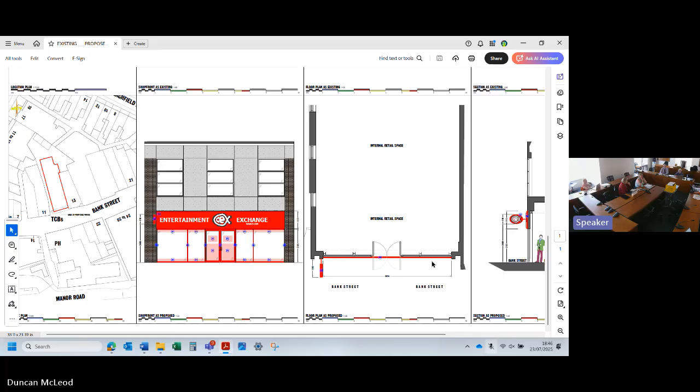It's annoying because it's on Bank Street and I haven't been able to get a photograph of it, unfortunately. It looks horrible, those big banner signs. That's what these are.

So what would you do instead? We're trying to get people living back in the city centre, getting flats developed over the top - the gaming station opposite, above Fat Willie's workshop, is being converted into flats, and the chemist has got flats coming in over it. So I guess the old NatWest Bank is empty on top.

Does it give an idea as to how long it's going to be illuminating its signs for? Because I really don't see the point of an illuminated sign that close - you can't get far away from it. I am objecting to that in my mind - fine, have a sign, but it doesn't need to be illuminated.

But there are ways you can do a sign which isn't illuminated, because we definitely have a policy looking at this - a standard that says ensure signage enhances the shopping environment in the host building. Newquay is full of signs that compete for attention - size, shape, material, and colour - which often results in a discordant, cluttered shopping environment. Avoid using large box signs that often disregard the building. Now, to me, that is a large box sign. Yes, it is. So I would object to that.

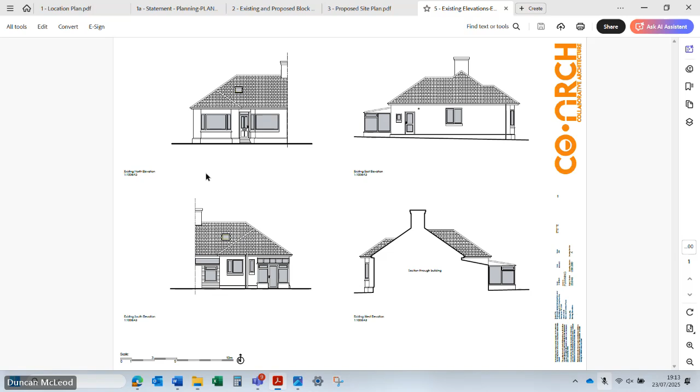And then you've got this box which has no windows on three sides, and only has windows on the front side, which I don't think they show on here, do they? No. So then they have the outbuilding elevation. And it's made from corrugated iron - it's a corrugated metal box.

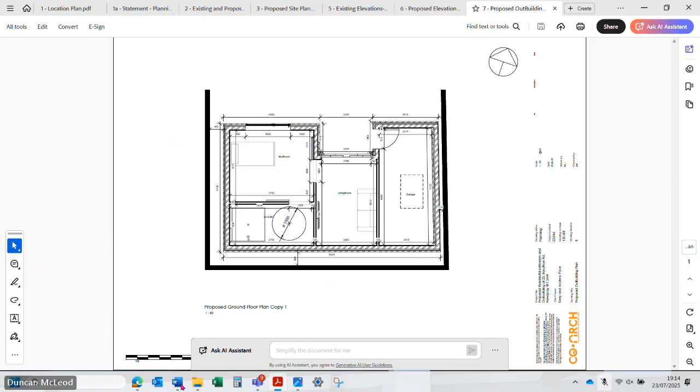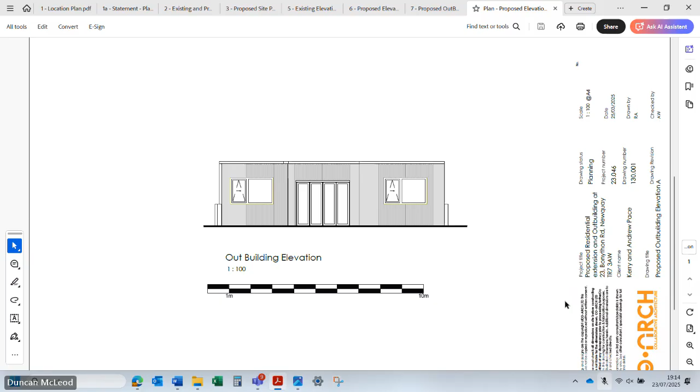If you like, proposed outbuilding plan - have you got the proposed outbuilding elevation? So these are the only windows. There is, I think, a roof window on this side. So it has fold-out windows at the front here, but this is set in, so it's like a C shape, which you can't tell from seeing it from the front. So this is what they'll be looking at from their house, from that new extension. It's a little one-bedroom flat, isn't it? Because it's got a living room. Yeah, it doesn't have a kitchen or anything, I don't think.

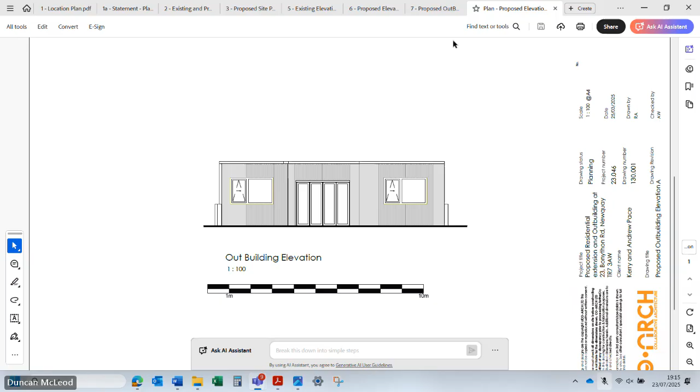So if we then have a look - I see what you mean, the garage, that's the existing garage. So if we have a look then at the proposed floor plans. Well, it's got the whole lot, I think. There is a separate one for the extension. Have a proposed outbuilding, okay. That's the house, but this has the extension in there - it has the outbuilding in there.

So these then are those fold-out windows, like concertina French windows, I presume. It still has a door which it's calling a garage, but basically would be a storeroom. And then it has a bedroom, little sitting room, and an en suite. So there's no cooking facilities there. How can that be for two? So it must be just for the one. I don't think it was made clear. Possibly for someone to care for the older one.

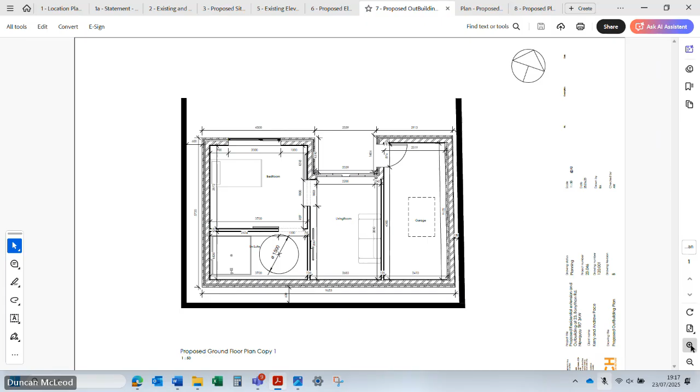So I'm not sure on that. It's a shame they haven't given it a porch, to give it just a covered area for that doorway going in, just a little roof. You'd think they'd put a roof over the top of that. Do you see what I mean? It doesn't, it looks like a window. If it's a window, then it hasn't got a door into it. So I was a little bit confused. I am inferring it's like French windows, but as I said, it's a bit odd.

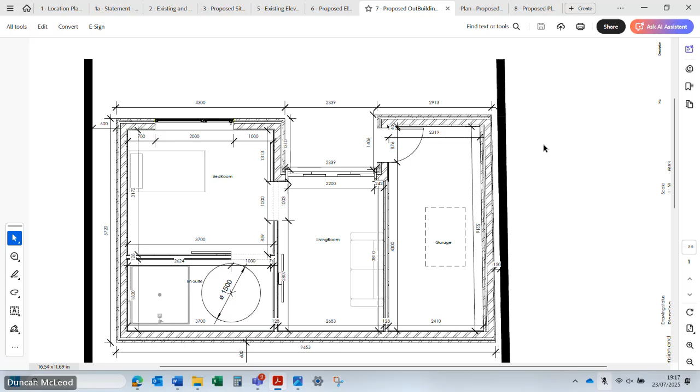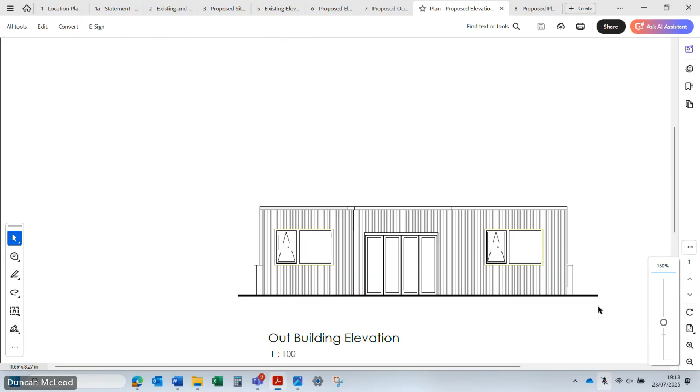Proposed. There we go. So it's put a window in the garage, but I don't think that's on the plan. Because this would be the garage bit. Right, that's the garage. But the only access to the flat appears to be these bifolding doors. Yeah, but it hasn't given that as a door, and that seems really odd to me. Sorry if I'm being a bit particular, but I don't think that garage window's there on the plan because it's got the roof light in it.

Do you want me to have a quick look at that? So there's a window - you see, there's the garage with no window, and no window.

So I think what they're planning to do is they're talking about respite care. So I think they will introduce someone who will live in that and take care of the children who are still in their bedrooms in the house. I think that's their idea, that's what they appear to be saying. And then they're saying it will allow the youngest child to gradually develop independent living skills. So he, or she, will move into that back place.

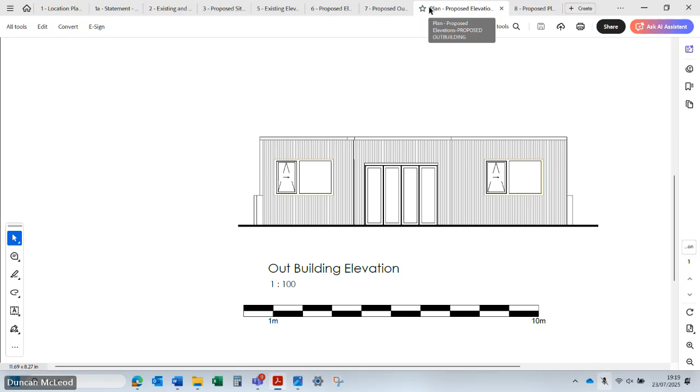I haven't got a problem in principle with any of this, but the plans aren't accurate. That's what I've got - that we're going to be giving permission maybe to something which isn't consistent. Well, there's a window there, and there isn't. And there isn't a plan. And what's the roof going to be like? Is it flat? It's just a flat roof with that roof light in over the garage.

I mean, we also have to look at it as a precedent for development along the back. But I understand why they need it. But the bathroom bit in the bottom left-hand corner, where's the window for that? Well, it won't, they'll probably just have a vent out. There's lots of internal bathrooms you have with no windows.

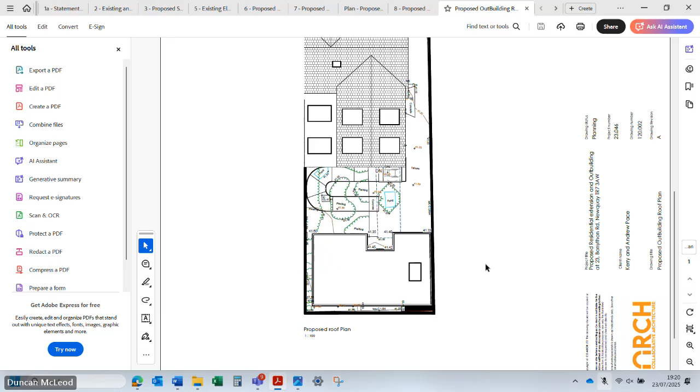I suppose the first question is, do we have a problem with them building an annex in their garden at that particular point? Forget what it's used for. No, I don't, providing there's no windows in the building. Well, it does set a precedent for... But it is backing onto flats. And the garden's large, so they've still got a front garden.

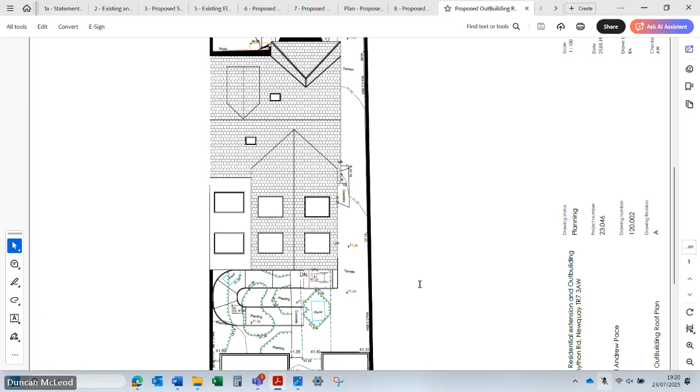Depends on extending the house, if there's windows. Yeah, I don't think they are. I think their windows face quite sensibly. No, I just put that as a subject to. But I would have liked another skylight over here, or maybe two. Yeah, you're right about the conflict in the plans, aren't you? Because they've got a Velux window on the roof, a skylight, and yet the plans say there's a window at the front, outside, on the plan.

And why isn't this covered over as a porch? I find that very odd, especially. Is that down to us to decide?

It's not, it is their choice. But they're going to have concertina doors, that seems an awful lot, you know, when it's blown a gale. It doesn't... but again, that's not a planning consideration. It's not, sliding doors when necessary. So I think we need to focus on what we're trying to focus on.

I mean, I don't have a problem with them building an annex in the garden - is that what we're saying, we set a precedent but we don't have a problem with that? It's a big garden, and to fit the gradient, because the steepest gradient you can have is 1 in 12 for a ramp.

So that's why it's so large, having to curve round to get the gradient right. So there's no kitchen, because the meals will be provided. Yeah, what they want is no thresholds, that's why you've got the funny setup - no thresholds, minimal doors, sliding doors when necessary, which is across the door front.

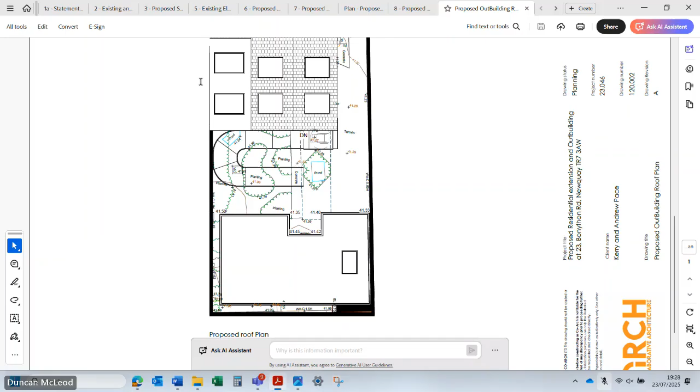Right, application 4, PA 25/03692. 10 Central Square, change of use and conversion of restaurant bar, Class E, to a place of worship and associated community facilities, Class F1, including consent to display advertisements.

Are you considering this one together with the next application, Duncan? No, let's look at the building. We've got two separate applications here. Although the first one says including consent to display advertisements, that consent is actually a separate application. So perhaps we'll look at that one separately.

So, the block and location plan. Oh sorry, before that, did we need an annex clause on the previous one? Can we annex clause on that as well, please? I had that written down, I just didn't vocalise it. Yep, thank you, all right.

So this is quite an extraordinary application, I've never seen anything like it. I know, yeah, I know. Are we okay with this?

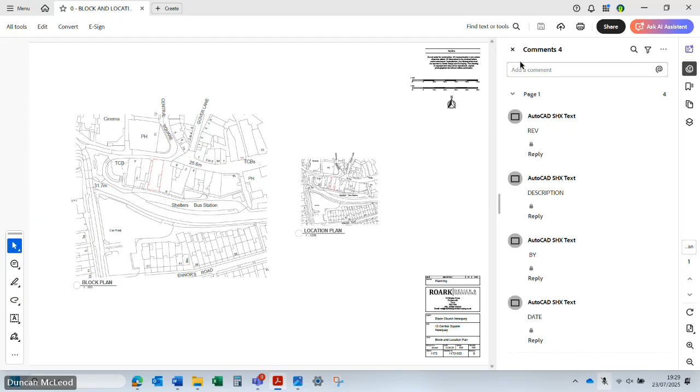Is it the old Lloyds Bank? So yes, this is the old Lloyds Bank, which does have a nice granite frontage.

Do you remember looking at the signage for this? No, I think it's not there now. It just arrived, it never applied for anything. Okay, anyway, so that's your building.

Right, so yeah, we're going to look at the block and location plan just to show you the red line site, and to note that behind the building is the bus station.

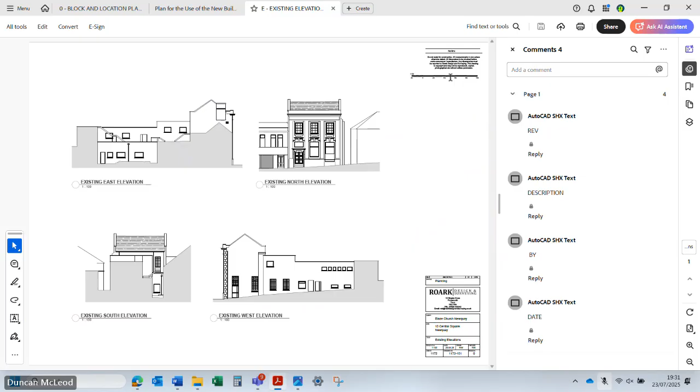Yeah, so we will look at—there is in fact a little bit of a change around the front, but we'll look at that in a moment. The key change, there are no significant changes to the exterior of the building, other than the existing elevation—you'll see towards the back of the building they are putting in a kitchen extractor unit. Unfortunately, Public Protection have said, well, you've not provided a noise impact assessment associated with this, so they're not happy with it until that has been provided.

They think the church is going to be noisier than the restaurant bar. I think they think the extractor unit is potentially going to be noisy. I don't know about the actual church and it's bought the building. Have they? I wouldn't know, I really wouldn't know. I believe one of my colleagues did a little bit, was quite interested in this and had a little look for me. I think that the Blaze Church, Newquay, has been operating out of Tall Trees, if that means anything to anybody. Oh my word, really? Yeah. That's huge, Tall Trees. Will they be taking all 3 dance floors up?

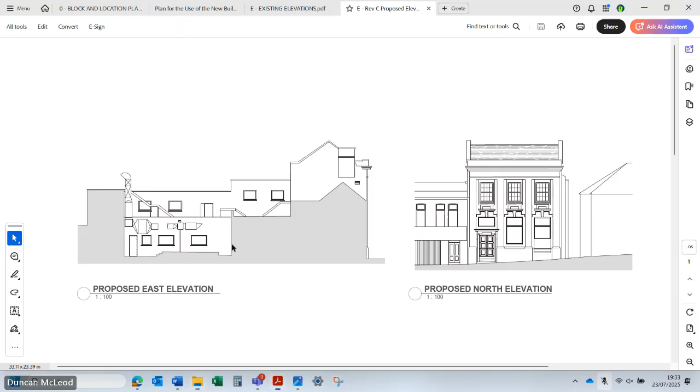Yeah, we've got—they've provided this sort of exotic drawing of the kitchen extractor unit. It does seem quite significant.

Noise, impact, noise and odour - we're really going to want to be satisfied about that. Doors and windows, yeah - replacing the roof, replacing all doors and windows.

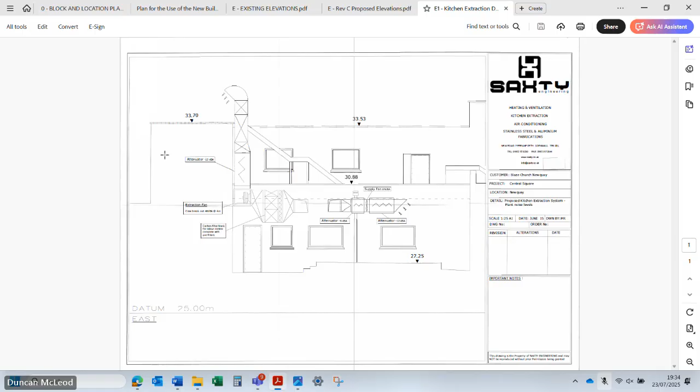So that's the existing floor plan. The proposed plan has no real internal changes - we're just given an idea of what they're going to be using the spaces for: kitchen, office, a refreshment station. We've got several activity spaces, but they don't seem to be physically changing the indoor layout.

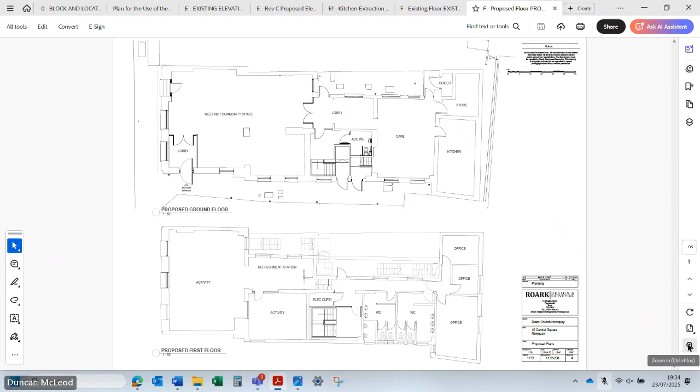What I wanted to draw your attention to, though, is that on this side, the principal entrance will be this side door. So if we go back to the street view - currently you've got these - that is going to be the principal entrance there. Not the front, but this side door.

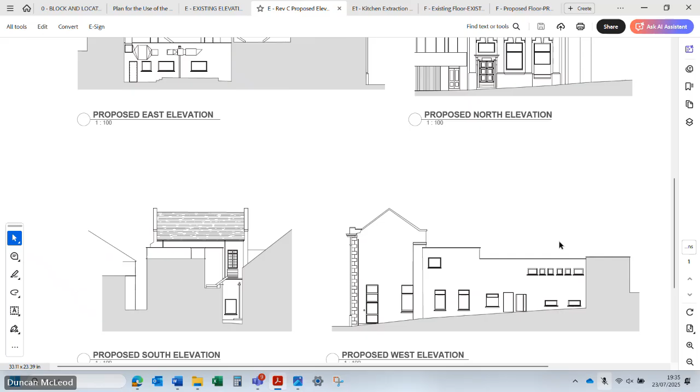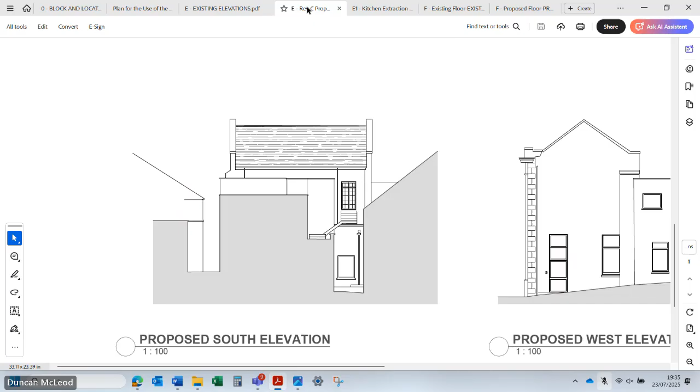This one here, I think they're replacing doors and windows, because currently they've sort of got - let's just come down - currently they've got lots of kind of gratings and stuff to stop people robbing the bank. What they're going to do with windows, because you've got these beautiful wooden, small pane windows - what are they going to have? What do they think the windows are going to look like?

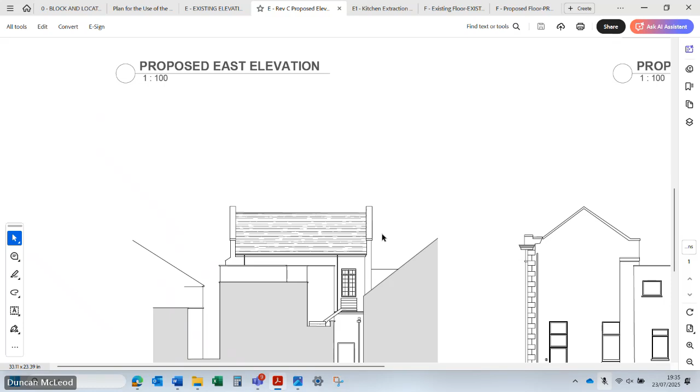These aren't - no, I don't believe that they're changing those, are they? I certainly - the changes that I could see were on the side of the building. I couldn't, if we're looking at the front of the building, I couldn't see any.

They're saying replacing all doors and windows, and to do that they're going to need more planning permission, I think. So is this just change of use by any chance? This is change of use and conversion of a restaurant bar to a place of worship. They're not asking us about what they're going to do to those lovely windows at the top.

And there is a cash point as well at the front of the building. Are they going to keep that there? Is that still there? I don't know, it's just still there. It's used all the time. Oh, so we're losing another ATM.

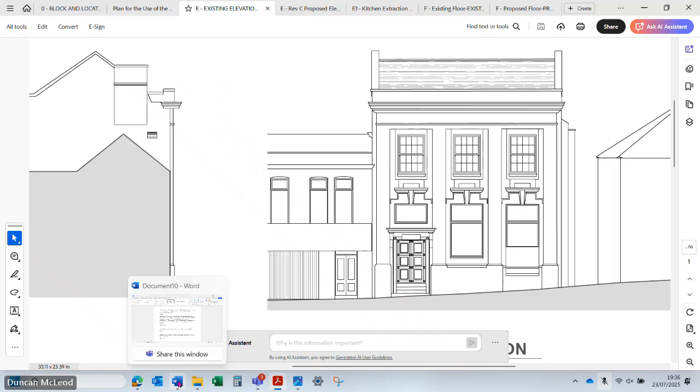Well, funnily enough, it's not shown on the plans, but it could still stay, couldn't it? We've got it there, because there is a big thing about the loss of ATM machines, isn't there? I think we agonised when they put it there in the first place - because it's such a nice building.

Yes, but it was a Lloyds Bank, so it was there when the bank was there, and it's still usable. So it was still usable from a point of view - somebody wants to be filling it with cash.

Just as a point of interest, that little alleyway is used by the drunks all the time to go and relieve themselves. So if their main entrance is going to be down there, that's going to be interesting. Well, maybe it will get people to use somewhere else - if it's more regularly used, no one goes down that alleyway, do they? So if it's actually a used location, then it will disperse these individuals.

Where it's been asked about change of use, is that right? Yes, yeah, that's the key element of this application - it's a change to F1, which is... well, it's interesting.

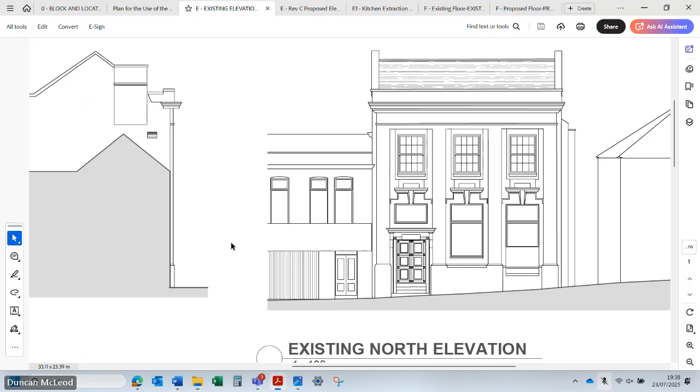Aluminium. If you're happy or unhappy with that - it's not a listed building, but it's not UPVC.

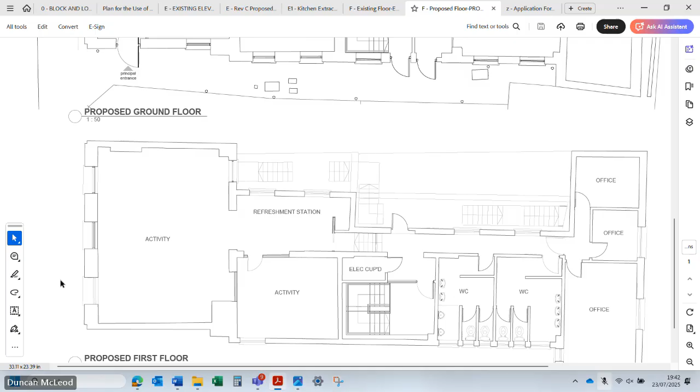Because I'm not sure it's a quality space for childcare that they're proposing, but still. So what - the heritage stuff, I've got your noise report, obviously public protection need to be satisfied, and I've got G2. So have they got an objection? It's a 3-storey building. Have they got anything for the top floor?

1, 2. Oh, okay, I think that's probably a void space up there. Okay, okay.

So what are we suggesting here? No objection - no objection because I think we... Do you want to press it on? I'm going to propose no objection. Change of use is, I don't think, a problem, although it is a very interesting place to actually put a church. We would like to hear on the basis that they are planning to change the windows.

They would like to have the heritage officer take a look at the sash windows. And they're talking about replacing the roof as well. I mean, it's going to cost them a lot of money. But so I think that's probably a no objection rather than a support.

I would like to know if the cash point is planning on staying. What's happening with the cash point? I think - what's happening with the cash point? It's just useless. And I wouldn't like to think that the architecture is going to be covered over in any way, because it is sort of a nice frontage to that building.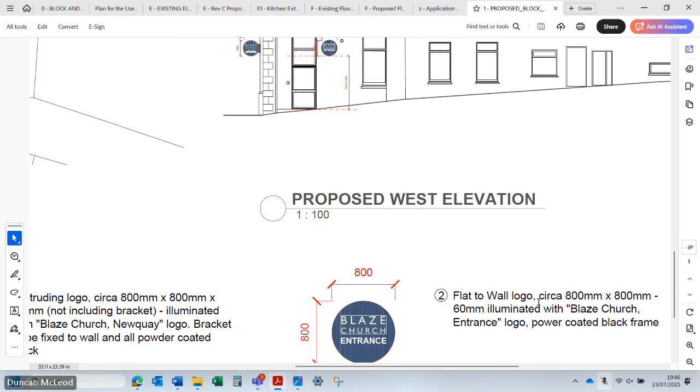This west elevation is probably the best one to look at. There are 2 signs, as you can see. One is a protruding sign, which is already there, and then they've got one over what's going to be the new principal entrance. Okay, we have a little bit of detail here.

So this is the protruding sign, illuminated, with the Blaze Church Newquay logo. That will be protruding at the front, and then the one by the principal entrance, the side door, will just be - it's illuminated again, but it's not protruding, it's flat against the wall. Well, it's just going to be illuminating a wall.

Is the current wax sign illuminated? Because there's a current wax circular sign on the bracket. We never saw it... there, isn't there? There's that one there, yeah. It's got electrics going into it, hasn't it, above it? It's the same, isn't it? It's got electric there.

So it's internally illuminated - we never saw an application for it, so we don't know, but there's electrics going into the sign from above it, so we assume it is illuminated. Well, it's already there and done and dusted, isn't it? I'm not sure why. Well, I suppose around the corner.

Are they having it in the same position, or are they having it higher? Because it's quite low down, that, isn't it? Really. They do give some thought - if we put it, it's going to be the same place, isn't it? Yeah, it looks like it. They've certainly established on one of these drawings.

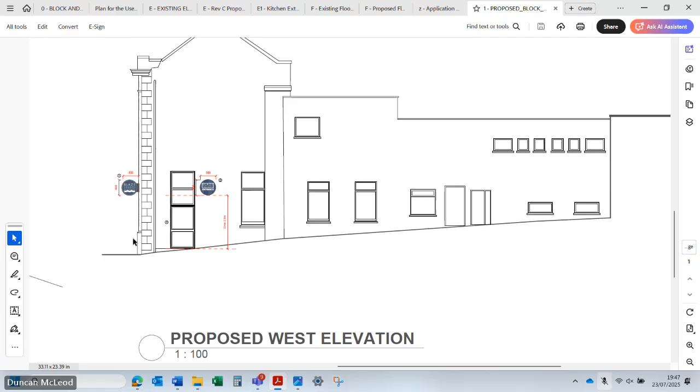They've established the height is sensible. Oh, it's this one here - turn my head a bit. They're going to put another one at the front. Ground level varies, not less than 3 metres to the underside of the projecting sign.

So they're moving it to the front by the door. Yes, they are, yes they are. A bit crazy because they're not using that entrance. Yeah.

By the door. Oh, I see, so it's not the same. No, it's not. Oh, they have one, they have two. Oh my gosh, wax is just completely evident. So we're actually losing an illuminated sign as a result of this application on the front of the building anyway. Have they got any more? Look at that, it's ridiculous.

So under national guidance, this wouldn't have gone through - having 4 illuminated signs is complete overkill, you know, with the Tesco thing we got down from 3 to 2. I don't like the illumination thing, I find it very unnecessary.

Give them permission for one at the front and not two. Well, that's all they're asking for, isn't it? No, they want the one round by the side door. They want this one, and there'll be one round on the side, on the alley, flat to the wall - illuminated, flat to the wall, about 4 foot opposite.

But I think it's quite discreet. I mean, it's white lettering on a black background. Yeah, and we can see it's wax there, can't you? And you can see the far one that says wax.

Why does it have to be lit? I don't see the point of the illumination. Yeah, but we're trying to cut back on illuminated signs, I would have thought - at the front of the building, to have one by the main door that isn't going to be open. Yeah, it's a bit odd. I mean, by all means have the one by the cash point and the one flat against the wall - that's where their entrance is going to be.

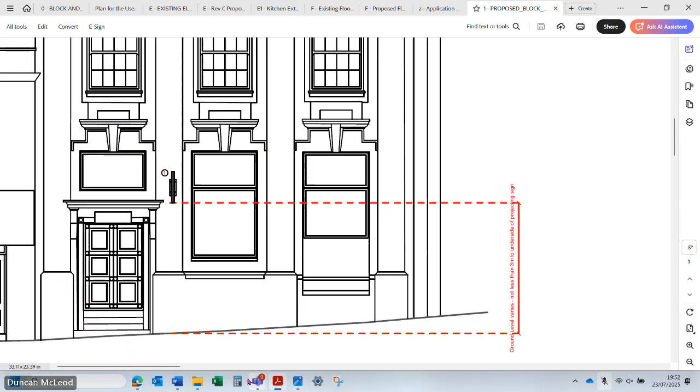Right, so let's close this one. 51 Tretherras Road - so, it's 51, to the... right. So 51, it isn't where that red pointer is, it's this property here, kind of at the end of the cul-de-sac. The street view isn't great, so let's have a look. Right, there it is - so this is the cul-de-sac, and there's the property at the end. Oh, nice bungalows.

Is this the one that goes up the hill, 51? So you take a sharp left off Ferris Road and it goes up. It's not, is it? No. So you come up... yeah, I think you swing off and it goes up a hill. Yeah, that's right - so it's at right angles to the main road. Yeah, and then there's a walk through to...

I can't remember where it walks through. Go down to Duke's Way. Is it down to Duke's Way? Are we down that way? The other way, that's Duke's Way, Shackleton. It's the one, it's Pydale.

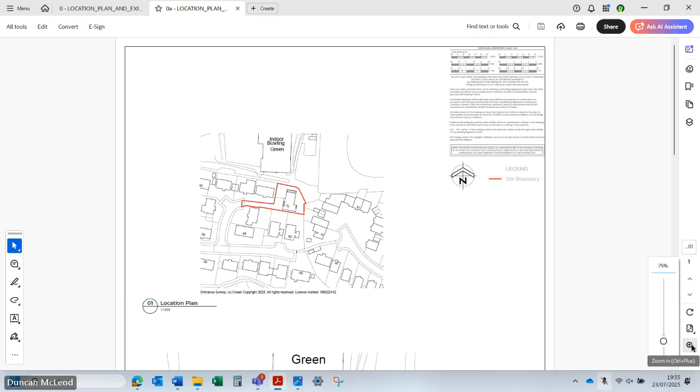Oh, I see. Right, so let's see, we'll look at that one actually. So you can see that the extensions being put onto the house are hatched in grey there. Two of these are effectively infill, and there's one which modestly extends the building line northwards.

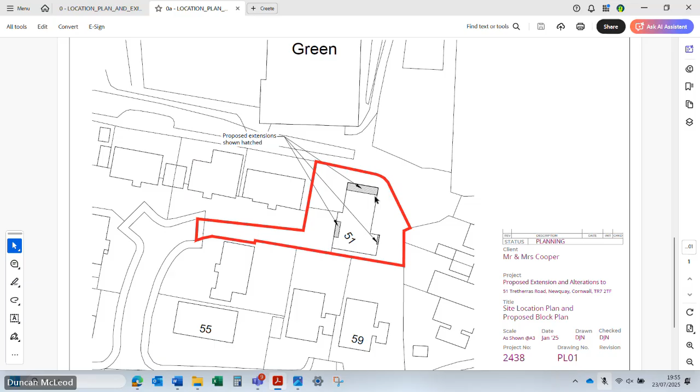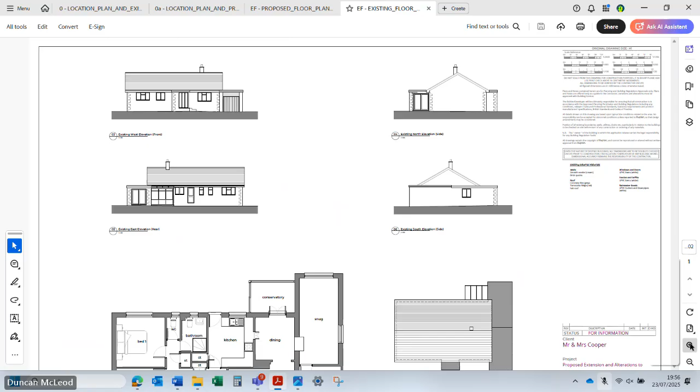We'll have a look at the elevations now. Right, I'm going to start with, I thought it'd be best to start with the floor plans actually. So that's your existing floor plan, and the proposed, as you can see, I'm going to start from left to right, I think.

And then the bit at the top, at the moment, you've got a conservatory there. The proposal puts bricks and mortar and squares it all off. So it's allowing this kind of more open plan kitchen dining room.

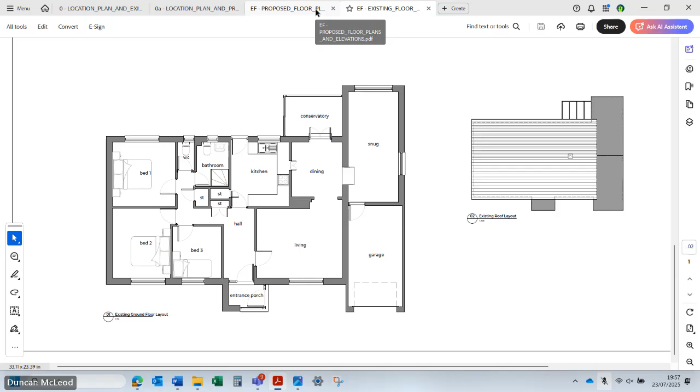The roof plan, well, you can see you've got sort of this slightly longer footprint to the building. Perhaps the most significant change, though, is at the bottom here, the extension of the pitched roof and the extension of the gable end to the roof. So you'll see that we're extending both northwards, but we're also extending over the flat roof section with the pitched gable-ended roof, and then they're creating another gable end where that living room is, basically over that living room space.

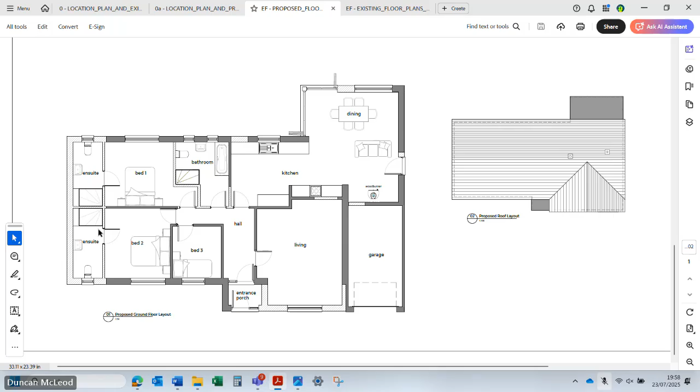These are oriented the wrong way, though, aren't they? That's the way that they've provided them.

So, right, so in terms of the elevations, if you look at the west elevation, you can see they've extended the pitched roof, and you've got this new gable end facing at the front of the building. Which is just facing effectively above that garage door. Yeah, facing down the road. Yeah, facing towards us. Yeah. Okay.

The north one, that's top right. So that's kind of just showing us the new profile, conservatory being replaced by this built section and this new pitch roof gable end.

The east is the rear of the building, so that's sort of the rear of that flat roof garage section. So you can see the roof extending along that way. Now that's extending in the southern direction. So that's the one that in the pre-app that they actually had an issue, because you've created in that southern section, you've created this new gable section and you've extended the roof in that direction.

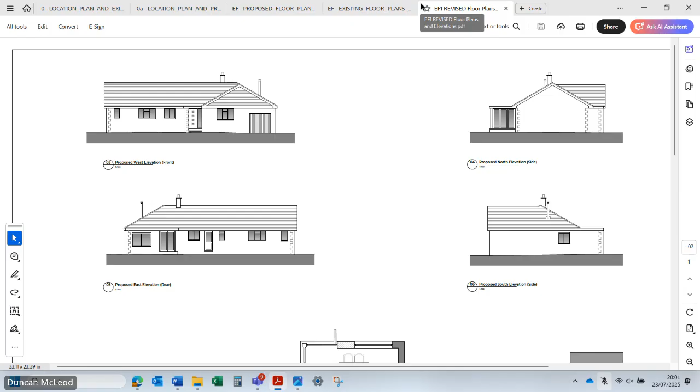That's your application. Can we have the site plan? Have a look at the site plan. The location plan, is it, or the site plan? The location plan. I don't see how that, no, the one they're proposing, that's the existing, I think.

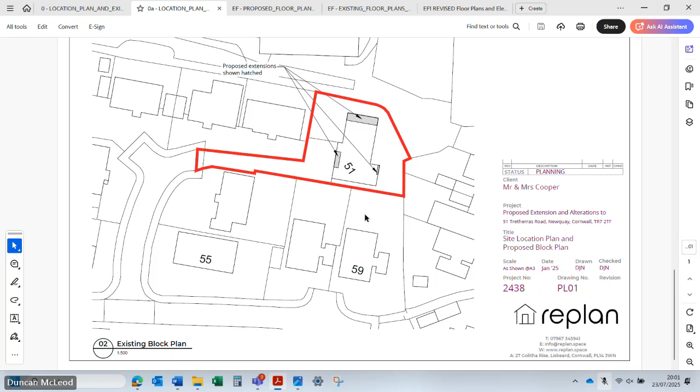I thought they seemed far enough away. We can't really see from here, unfortunately, but I thought they seemed far enough away. That was what the pre-app came up with, and they have responded to it, albeit with the second set of drawings. I haven't got any problems with this at all. Can I propose that we support this? Seconded by Sandy. All in favour?

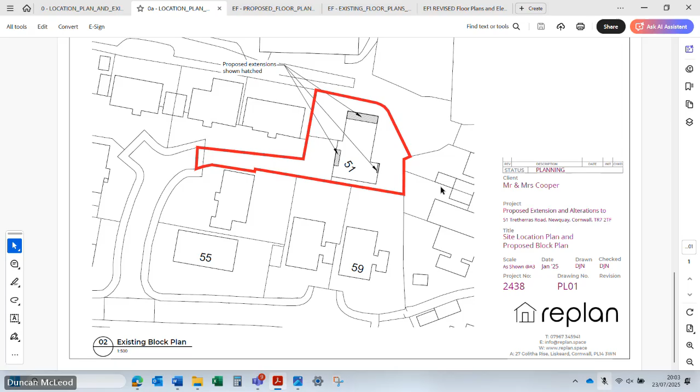Oh yes, surface water strategies were provided with this planning application. Please note that discharge into the ground infiltration is South West Water's favoured method and meets with the runoff destination. Oh, there you go. So South West Water were happy with that. Yeah, so that's good, I'll include that. Brilliant, subject to no harms to neighbouring properties. Yeah, brilliant. Okay, awesome. Go us. Right then, go you.

So this is application 7, PA 25/03562, 31 Headley Road, proposed new roof and first floor accommodation. Where's Headley Road? Parallel to the other one. No, it goes towards the hospital. Yeah, off Tretherras Road, over the boating lake. Right, so the property in question is actually the one immediately south of the red point.

I think I pointed to probably the right place, so it's on that bend going round on the corner. Yes, it's sort of quite a large plot, call that a corner plot, I suppose. I'm going to use the map from 2009 because it's the least cluttered. If you look at the others, there's all sorts of stuff there, but the 2009 one is nice and uncluttered. Again, have they lost the garage or project? No, it's still there, I think.

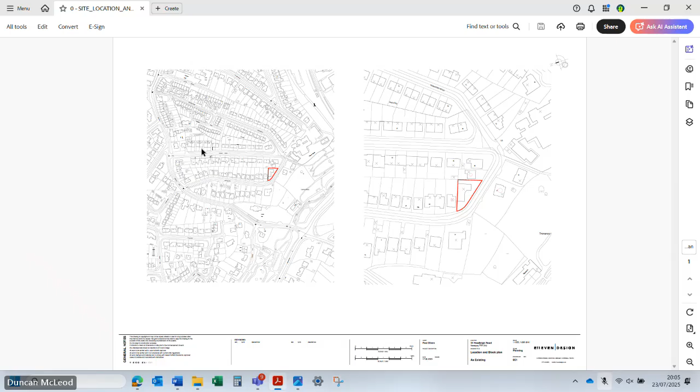That's just to give you an idea of the application site, the property boundary effectively. Block plans, right, so I've got 2 here. I think we can nicely compare those. Oh, they didn't really actually, they weren't that useful, to be honest, they are a bit small. The key takeaway from these was that there's not really much of a change in the footprint, apart from...

I'll just zoom in a little bit. You can see you've got this bay window here, we can see it on the... that wall will be flattened off. So if we look at the proposed, you can see that wall is, and they've managed to include one of those cars in this one as well. They've flattened off the front there, so that bay. It's basically a bungalow with the undercroft garage, isn't it?

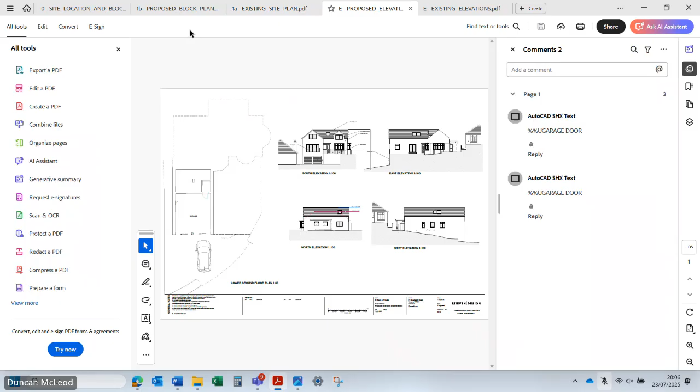Next up, elevations, let's compare these. Making that room bigger? No, they're making it into a full-on house. Yeah, if you read it: proposed new roof and first floor accommodation. They are creating a new floor to this.

So at the moment, what they've got is sub-basement and ground, is that what they're saying? Yeah, effectively you've got what I would call a ground floor and a lower ground floor. Hold that, Duncan. It's a bungalow on top of the slope, isn't it? Yeah, but it's the neighbour here. So this is going to be up here, accommodating, and that is the neighbour, south of the neighbour. There's going to be light and outlook issues because they're very close together, those two buildings, and losing the tiered effect.

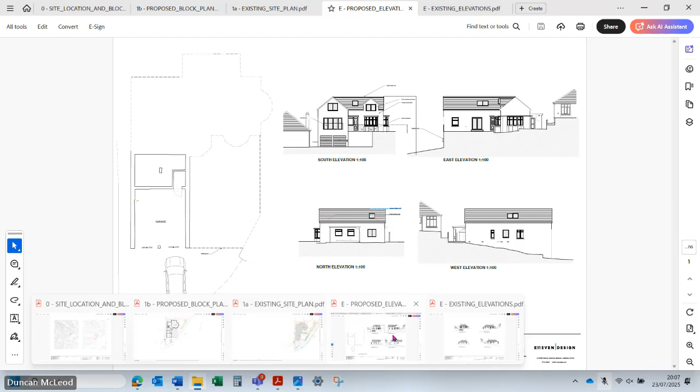It's a classic tiered effect. Yeah. Potentially. Right, where were we? Elevations.

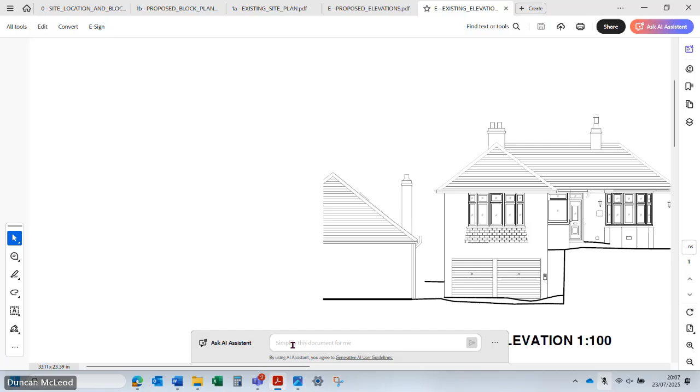Right, where are we going to start? The south elevation. That's the one, south elevation. Gosh, look at it to the neighbour, to the west.

So that's your existing south, and that's your proposed, so it's pretty... Can we see this existing? That's the existing, yeah, and that's your proposed.

So the first key thing, obviously, you're going to be interested in is the ridge height. The ridge height, by my reckoning, is increasing by 1 metre. I wish architects would actually do this rather than groping around. From hip to gable ended, so you can see you've got - here - so that adds kind of scale and mass, and usable floor space, obviously at first floor level.

Is that setting a precedent on the road in terms of look on the road? I don't think it does because it's in such a unique position. I don't know, driving it, I mean that is the entrance way down that avenue, isn't it? On the road, what you've got at the front here is the bay windows gone, that's replaced by a Juliet balcony.

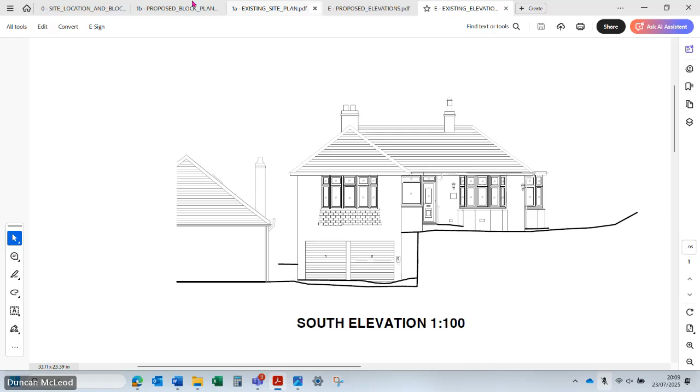Fenestration to floor level with a Juliet balcony. You've got the addition of a south-facing dormer at the first floor level and a glass balustrade at what is the ground floor level, which I think you saw on there, especially that patio there. Gosh, that's huge, balustrade above the ridgeline that they have built.

By about a metre. They've got these two chimneys, haven't they? Are they, what's happening to them? Yeah, the chimneys are going, because they're remodelling the whole roof. The whole roof is coming off, they're building up, and then they're rebuilding.

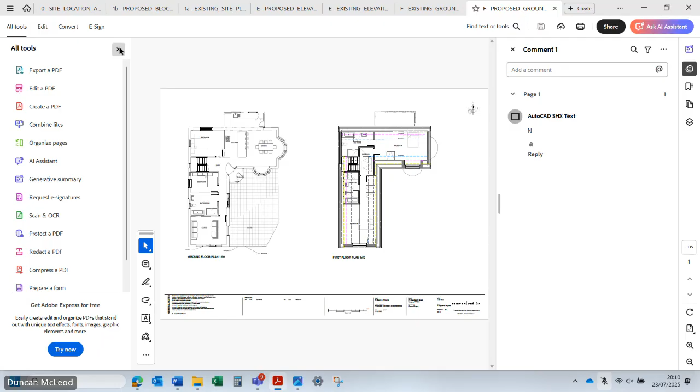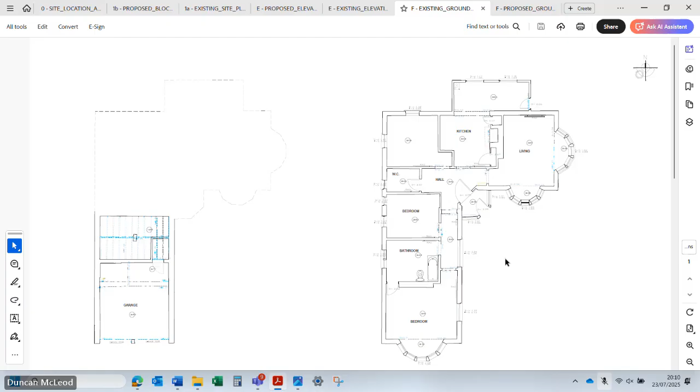The floor plans, I mean, they don't tell us that much. There's no change in the footprint. Lower ground floor level is the garage, and there's no real change there. So you'll see at the existing, you've just got this garage at lower ground floor level, and then the ground floor level. The property goes from 3 bedrooms to 4 bedrooms.

Kind of 2 bedrooms upstairs, both with ensuite, and then they get rid of the bedroom at the ground floor level and make better use of the space that they've got. But that's the new floor that they're creating there. So there you go, over to you.

Can I have a look at the street scene, which shows what the house next to - is it east or west? Which will be the one up above. Can we get any nearer to that to see if it's got any windows? I mean, it's just got that side window there.

Yeah, it hasn't really got... No, so I mean, that looks possibly like it could be a bathroom. It looks obscured to me. So although it is affecting the terracing, it doesn't look like it's going to get in anybody's view.

How much higher is the building going to be in relation to the house next door? It's coming up to the same level, just about. No, it's still above it. According to the diagram, it's still above.

If you look at it sideways on, then actually, you've still got the terraced effect if there is a metre there. The difference between those - yes, it's more than a metre. It is. Okay, but the terracing is really about the view, so they don't appear to have a window that affects the view.

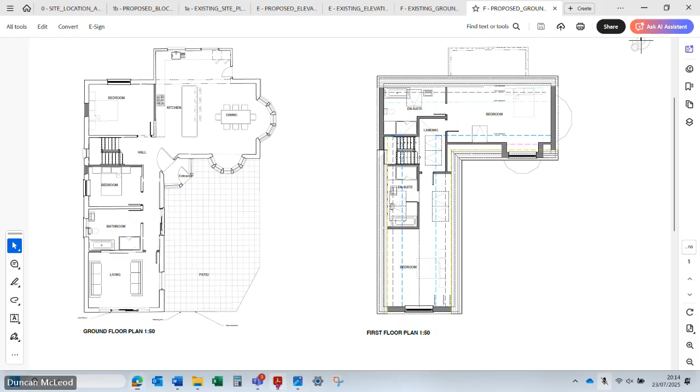That's the front, well there are at the back, obviously more windows. It's quite useful, there's a Velux window, I think. Yes, there's a couple.

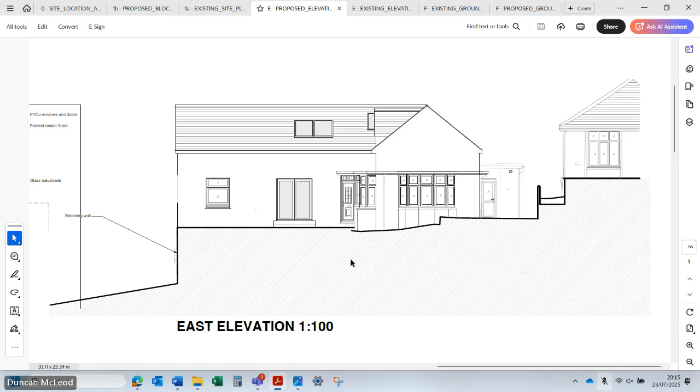At the moment you've just got the ground level windows. That's the side, it's the back in terms of the back garden of the neighbour. So the north elevation has got that sort of... is there a window on this side? So on the east, north elevation. That's the east that you're looking at. Okay, I think you're talking about the north elevation, that's the back.

This is quite a useful diagram because it shows you the existing ridge height as well. Oh gosh, it's quite an extension, isn't it? So it is 1 metre 4 centimetres, in fact.

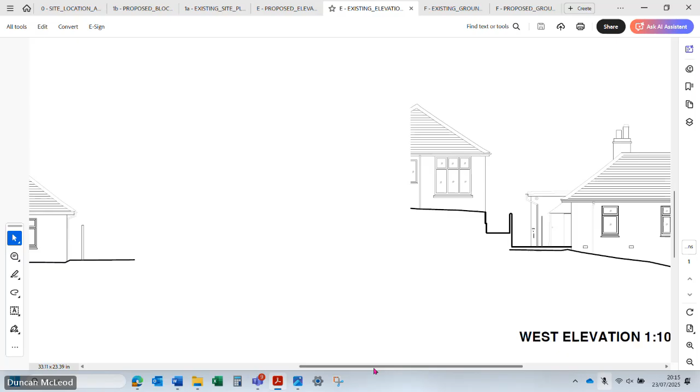So let's just get that north elevation up. That one, so that's what it looks like at the rear of the house, the one that's facing the house, sort of. That's the thing. So that's quite an increase in mass as well, isn't it? But I think because of the way the other one is designed, I think it's acceptable.

But if we can just put it subject to... so are we okay with no objection then? Yeah, I mean, with me with lots of bungalows, not madly enthusiastic about it. I'm not madly enthusiastic, and we want all the solar power stuff, please, definitely.

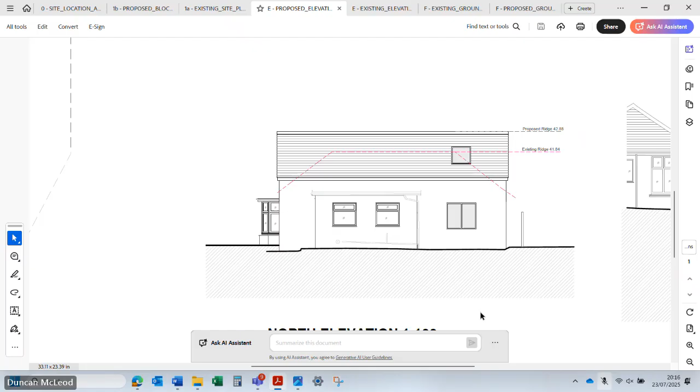Were there any comments regarding this one? South West Water. Well, I suppose there is an increase in the footprint, is there? Which roof is this, facing south? The other side, this is the north side. So they should have solar panels on that side, that's the south. It's a bit more awkward. Yeah, we can certainly encourage that.

I mean, it's not creating any new views there, is it? The patio area is huge. Can we make a note that the patio be permeable? I've got rid of the bay. Because it is a very big patio area, that one.

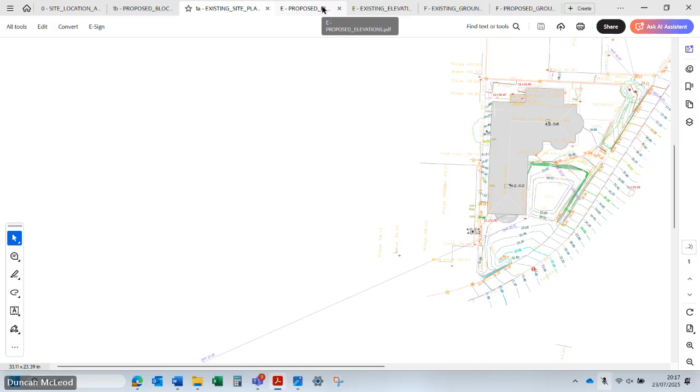Is the current entrance for the drive right on the corner? It's got a drive and then it goes into it, doesn't it? Yeah, no it does, doesn't it? It's a very peculiar site because it's on that corner, with the steps up to it and the glass balustrade. And it's not looking over anything opposite, it's all hedged and fenced and things.

So, anyone making a proposal on this one? Propose no objection, pending all those bits and pieces, Duncan. I'll second that. Are we voting on that one? Yep. Marvellous, thank you, interesting. Great, yeah.

Some of us have seen this. PA application 8, PA 25/04883, 12 Whipsiderry Close, replacement dwelling in lieu of approved extension and alteration application from last year. Some of us have seen this house more than once, a few times.

There are two public comments - one support, and one... they aren't marked as objections, but they do have some concerns to raise.

So Whipsiderry Close is a private road, as we know from street trading during Boardmasters last year, because we ended up with street traders at the mouth of it, quite close to where we saw the presentation. Cornwall Council did a reasonable job of getting rid of the hot dog seller.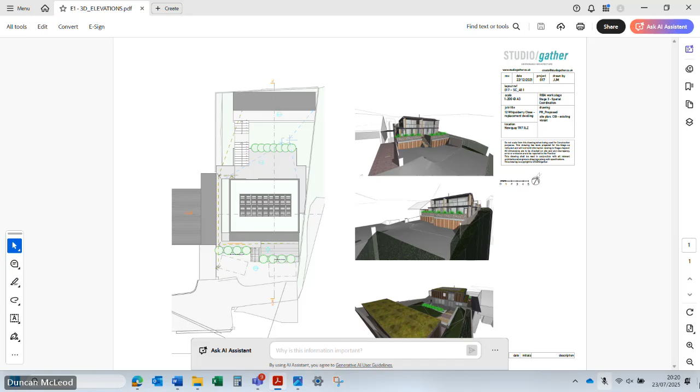So yeah, we said yes to this one. I'm going to make this quite a bit bigger so that you can see. That one, yes. There we go, plonk him in the middle. So January 2022, this was an application for a replacement dwelling, and this committee said yep, we gave our support to it.

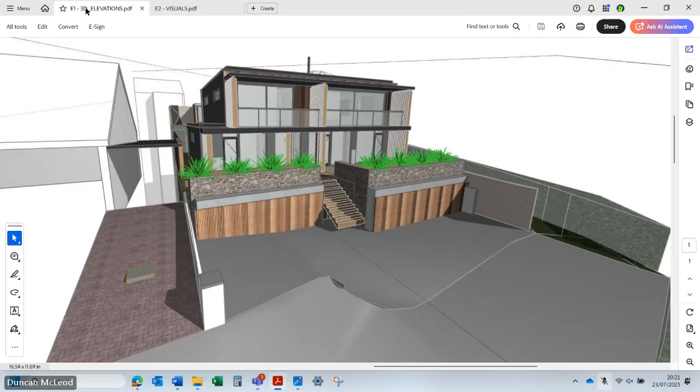In October 2024, this committee raised no objections to proposals for a first floor and side extension - not a replacement dwelling, but an extension, and really quite serious remodelling. It was in a similar style to the one we'd given support to, and this gives you a nice photograph of the existing property. It's fascinating to see that can be turned into that without pulling the existing one down.

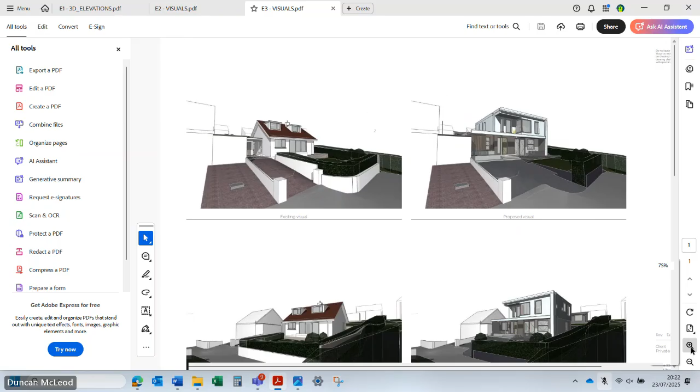Anyway, the third application, the one we're looking at tonight, is a replacement again rather than an extension, and it looks almost exactly the same as the last application that was approved, the extension one. So instead, it's the same sort of plan, but they're knocking the original down. They've obviously arrived at a shape that they like when they looked at it in 2024, and this is what they can do. But this won't be an extension, a remodelling of the existing - this will be pulling down the existing.

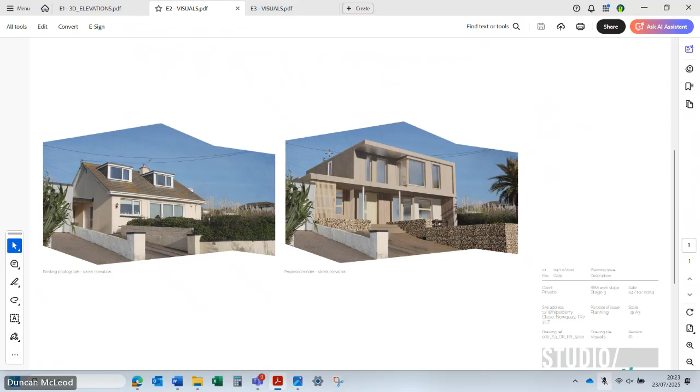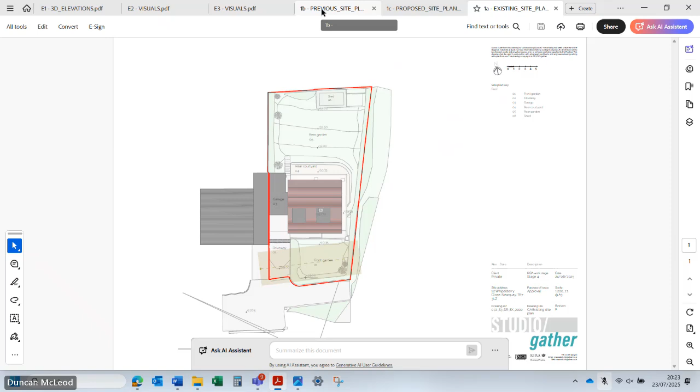So the two comments are both saying that the roof line appears to be higher than the previous application, by 30 centimetres - that's very little. They're also talking about an outbuilding, which they've got some concern about as well. So the existing site plan has a shed at the back of the garden. The previous approval has this outbuilding at the top of the picture there, and this current one also has that outbuilding, so effectively I do understand that people might be concerned about it.

Planning have already said yes to this outbuilding one. Sorry, when we went back to that previous one, what's that on about? Is that terracing on the side? No, that's the neighbour that they put in, as opposed to that.

So in actual fact, you can see that the footprint is actually slightly smaller than the current one, slightly smaller footprint, 30 centimetres taller. And I think they've got solar panels on the roof, haven't they? Yeah, those are all solar panels.

This was always about, and we clarified it, didn't we, that there was no overlooking with the side. I think on the west side we put in obscure glass for the slit side windows, I think that's what they had in the drawing. They don't seem to have them.

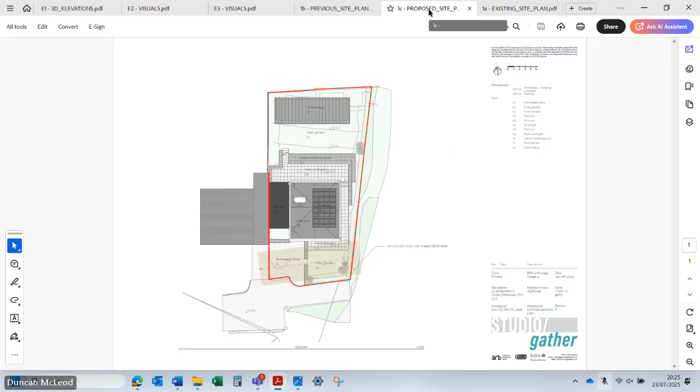This is a roof plan, isn't it? From above, elevations, visuals. So those windows at the side there upstairs. And have they got full-on access to this balcony now, Duncan? Because there's no balustrade around it. You see, before, I don't... let's have a look.

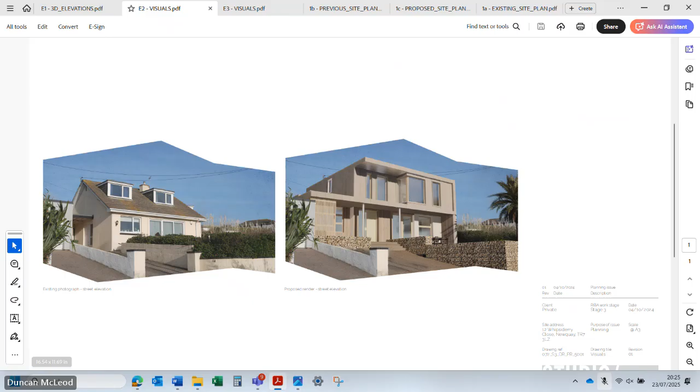It's that first floor plan. Oh yeah. But in principle, it's not a lot different to what's already been approved. No, it's not, that's what I'm saying, that it's been agreed. So that's around the side. And no, it hasn't, does it? No, they're windows. Yeah, no. So I don't think they're in the roof.

So can we make a note of that, that they don't have access to that roof? I think those are like louvre windows of some sort, aren't they? Yeah, because then there isn't a safety barrier there, and that's really close to the neighbours in terms of overlooking their back garden. So no access to that.

And then can we make sure we've still got a permeable surface please around that, which looks like they've got paving and their driveway. And I presume there's soakaways on it. There hasn't. Yeah, there we go.

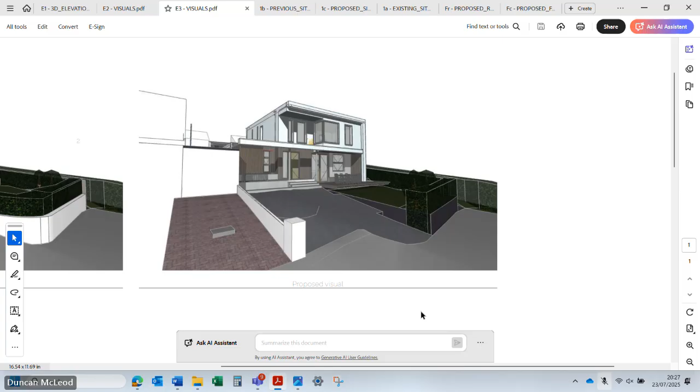If you want to make a note of that, it's just to address the concerns that they've made, that they've already got planning permission for the outbuilding at the rear. And an annex condition on it, even though there's no access to it from the side because there's no room to get around there, but we can stick that on. Is it just a shed? And that 300 millimetre increase in roof height is very small, and it's not impacting on the neighbours at all. There's variable roof heights on the road as well already, so.

Yeah, that does look a little bit annexy, doesn't it? Yeah, I think you're right about the annex condition. Have they given floor plans for the annex? I think it was going to be a gym, wasn't it, from memory? Gym? I don't think it had... I think it was a single room, but a lot of windows for something that isn't an annex. Yeah, true.

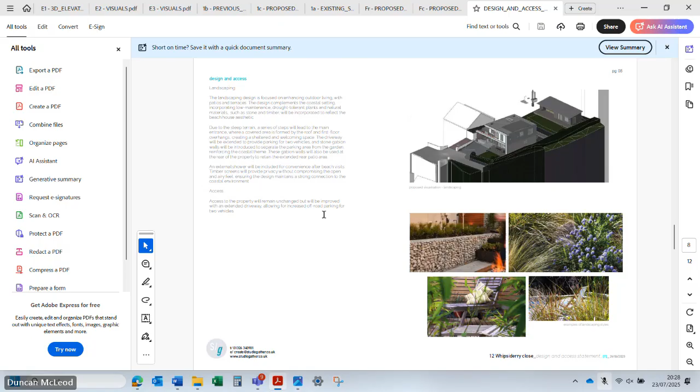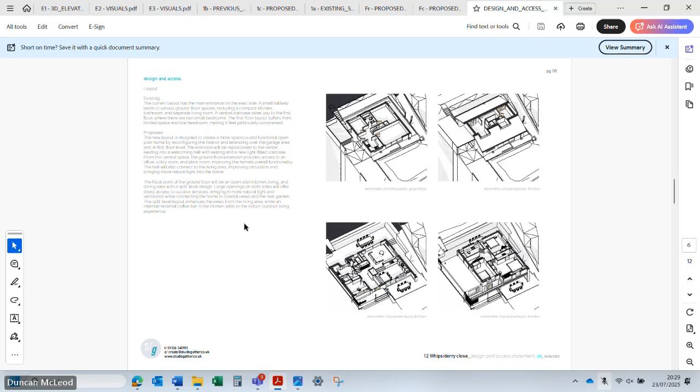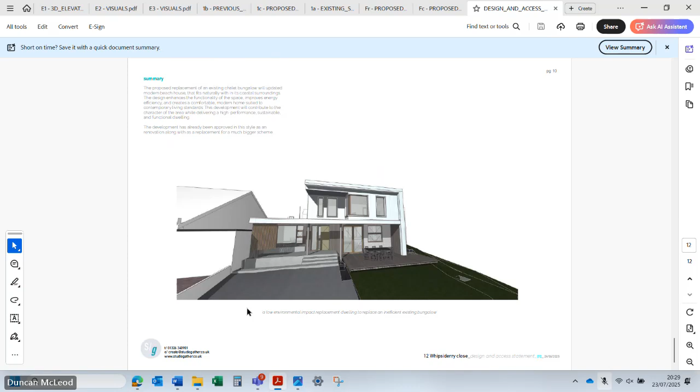Yeah, I can't see anything that tells us, so you're not saying much about that. No. So we'll ask a question about that. So are we saying no objection pending all those bits and bobs? Yeah, yeah, so I'll propose that. Sandy's seconding. All in favour? Yeah, wonderful, thank you, there we go, that's all right.

Number 11, terms of reference and risk assessment update. Duncan, because we're really risky people. Not this time, no, not the daring do. Not this time. Do we need a risk assessment for the chocolate digestives?

I did start writing one once upon a time. I soon gave up. No. I think I can sort of share my screen now. Actually, there we go, all right. Yeah, so there's nothing to do with risk assessments.

Okay, item 12 then: reports and any associated recommendations from working parties, and working party memberships. I went out to the world. These are your working parties - wonderful, for both of those. The Newquay neighbourhood plan, yes, so...

The detail at the top is from last time. So the parking working party never had a regularly scheduled meeting - no, it was as and when stuff was called on a need and convenience basis.

Bearing in mind that you have got that FOI stuff that we got, yeah, which hasn't actually been looked at yet.

Can I just say, for Karen's benefit, there's very little to do with parking on it, even though that's the name of the working party. When I joined it, I thought there was going to be more to do with parking than there is, but it's just general highway stuff. Okay, yeah. It does include parking, but I think it'd be better named maybe highways, roads.